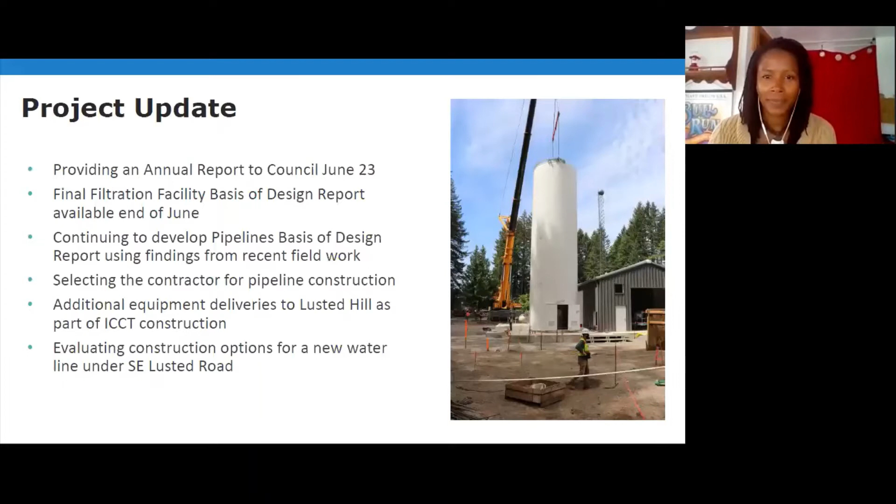Hello everyone, I'm David Peters, the Program Director for the Bull Run Treatment Program. I appreciate you coming out on this beautiful evening. Can't believe it's June already, but the year's moving along, and we appreciate the time you're sharing with us this evening. Just wanted to give an update on various activities we've had going on over the last few months, and some things that are coming up.

So we will be doing our annual report to the Portland City Council on June 23rd. Our agreement with City Council is that we will come to them and provide an update on the progress of our efforts, and this year that's happening on June 23rd. I know that information and the date and time will be posted on our website. Those City Council meetings are public meetings, so if you'd like to participate, that'll be available to do.

The final filtration facility, what we call our basis of design report, will be available at the end of June. That's a document in final reviews now, and will get posted to our website around the time of the City Council report or the week after. That basis of design report is actually the structure of what we're going to design and construct going forward. It has all the details about the processes and systems we'll be looking to incorporate into our facilities, much of which we've been sharing over the last several months. But that will be a final report form.

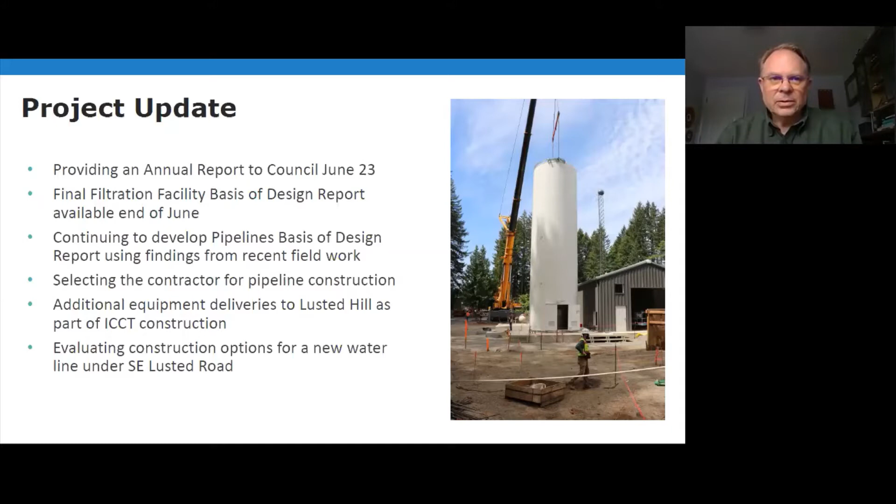Last month, my team was here, and our leadership team for the program in operations, design and construction all came and talked to you about the Good Neighbor Agreement and the details of that document, and provided their commitments to ensuring that we're going to meet what we put together in this Good Neighbor Agreement. I know we've had some questions about how that gets enforced, and that's through our commitments to you going forward. But it's also not just our program leadership team, but we have been sharing this with our leadership team at the Water Bureau, and that's where Gabe Solmer, our Water Bureau director, is joining us this evening to talk a little bit about that and sharing the Water Bureau's commitment to meet the impacts of the Good Neighbor Agreement. So Gabe, maybe if you'd like to jump in and say a few words about that.

Sure, and I know that was a little bit choppy. Can you guys hear me okay? Yes. Excellent. Wonderful. Well, thank you so much for the opportunity to be here.

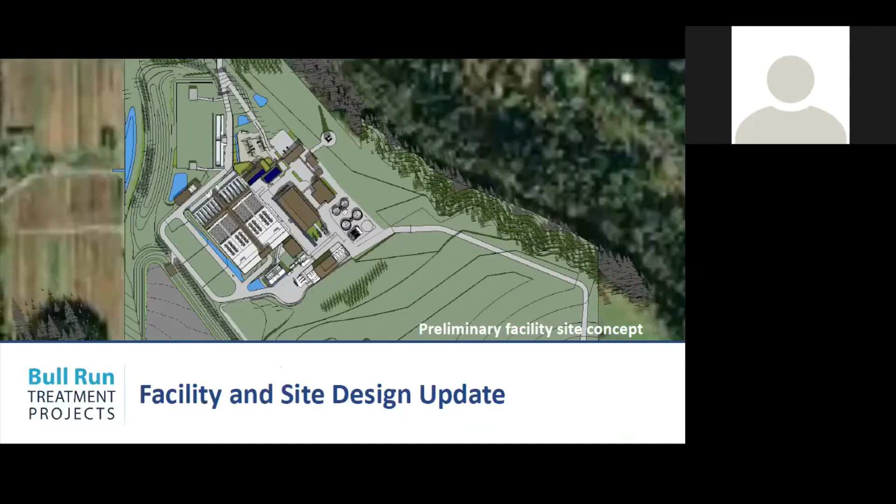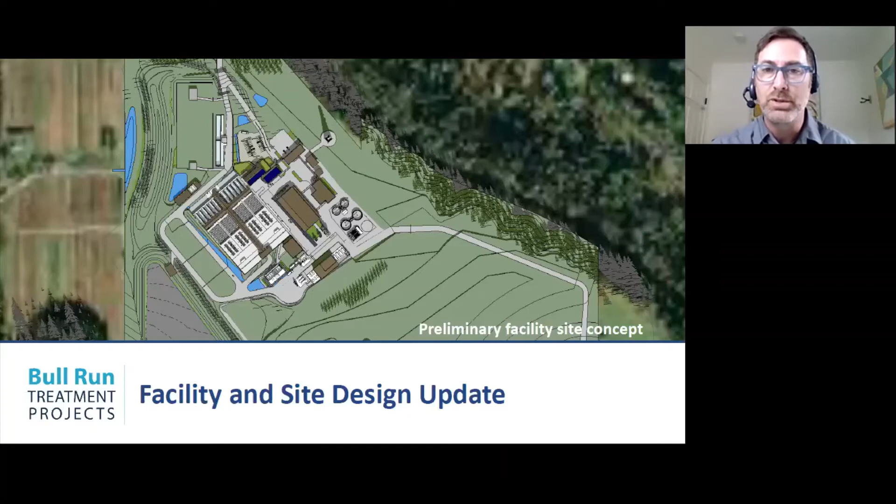Sure, thanks David. Hi everyone, good to be here again with you to talk design. Hopefully you can all hear me and you're all doing well. I am going to present some updates to both the facilities and the site tonight, and get some feedback from you to see if what we've heard from you is showing up in the design and if we're moving in the right direction based on feedback we've gotten from you in earlier meetings.

As a quick reminder, in the Good Neighbor Agreement we have some strategies guiding us toward a design that hopefully fits into the local surroundings and is as unobtrusive as possible—things like low profile buildings and natural looking materials, and maybe most importantly, trying to have an agrarian Pacific Northwest style and screen the site so there's as little visible as possible, really reducing impacts to the neighborhood.

So next slide—what have we been up to since we last discussed design? Well, we are in the 30% design phase, the first of four design phases for this project, and it's moving really fast. We are refining the design based on a lot of value engineering, which helps us look at cost savings, and we are really working on the building spaces themselves, making sure we have the essential spaces accounted for and trying to locate everything on the site the best way we can.

The site layout itself has remained basically the same as the previous time we've presented, with some small tweaks being made now to make sure everything fits in and we don't expand it any further. And the architectural style is evolving to take your and other comments and critiques into account and try to improve things. I want to talk about those changes tonight.

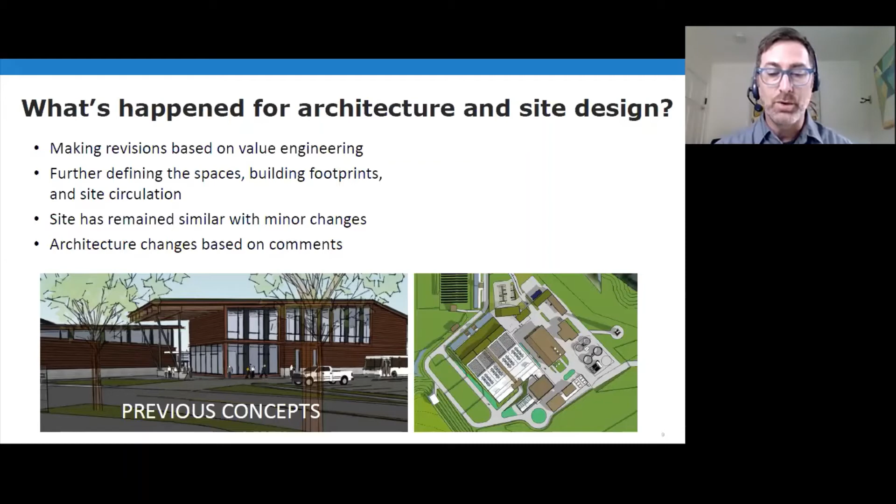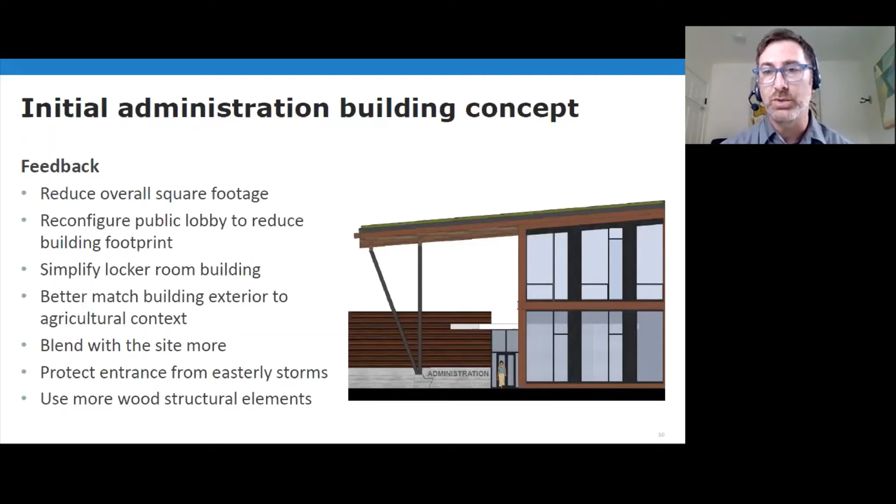So where did we come from? The last time we shared with you, we shared some images, some design guidelines we're working on for the look and feel of the non-process admin building, as well as the process buildings, and some feedback we heard from you and the Bureau. We heard a lot of overlapping feedback. Some of the same things came up, really rethinking the look and feel of this building, taking it more towards the agrarian rural nature of the site instead of the big glassy boxes that are maybe better in a suburban neighborhood. We're trying to find ways to shrink the building, reduce the overall square footage, save money there, and really thinking more about the weather of the site and protecting the entry in the building in that way. We're also looking for ways to integrate warm materials like wood into the buildings where appropriate, so we can really leverage our local resources.

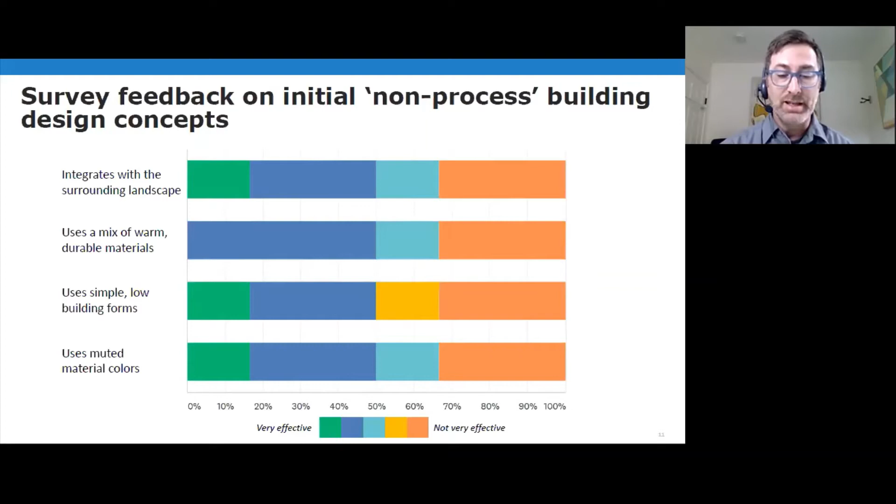Based on some of the public survey responses we got, we weren't quite hitting the mark for most of our goals listed on the left here. Most people thought we were halfway there. So we thought about this critically, and we literally went back to the drawing board for some of these buildings. The revisions we really looked at were based on these critiques, trying to make the buildings only the essential spaces we need, really looking critically at any kind of public function and things like public lobbies, and what's the best way we can serve that need without devoting a lot of expensive space to that. We did reduce the overall square footage.

I want to show you how we did things like move the lobby to basically a covered outdoor space that the operators and staff would use most of the time. We've introduced a more agrarian style gable roof form that, at a distance, would really make this facility fit in better with most of the other types of buildings you see around the area. We're trying to reduce the areas of large glass and look more at smaller windows and openings in these buildings to bring down that scale. We're also integrating more landscape around the buildings, not just around the edges of the site, to help bring down the overall mass of the building and to really try to capture and manage the stormwater as close to the sources of things like roofs as possible.

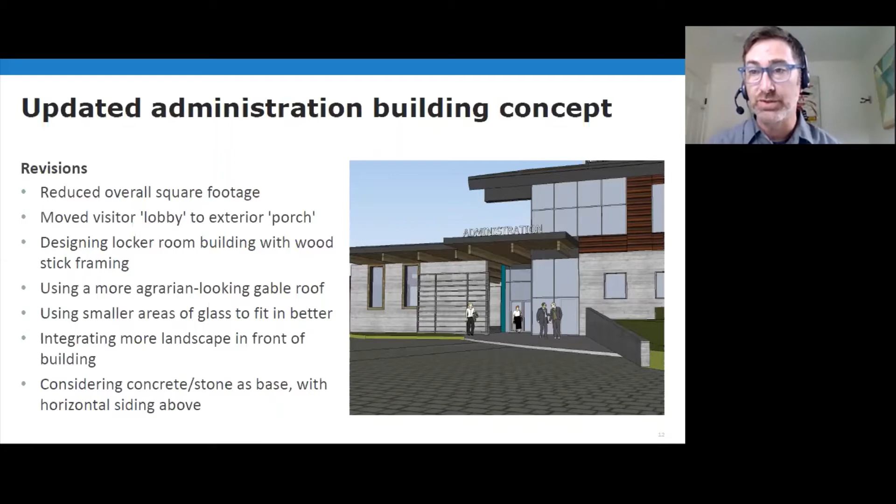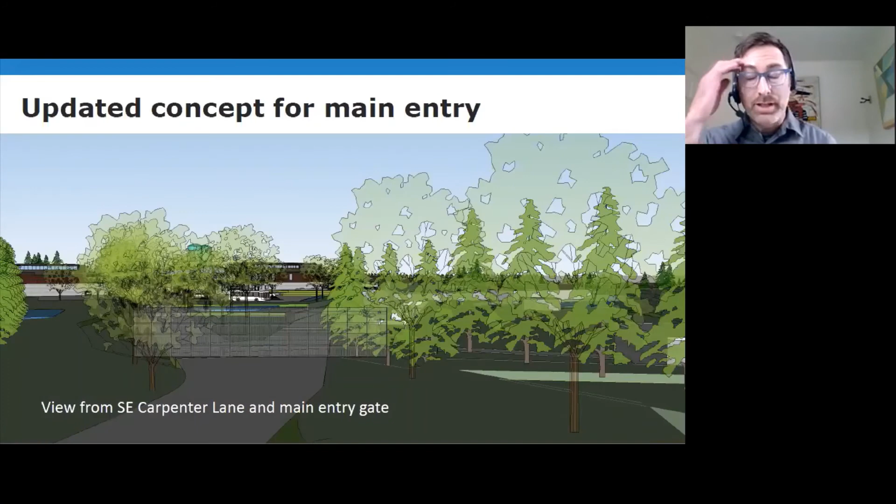Next. We'll discuss the site perimeter in more detail in a few minutes, but this view from the ground level at Carpenter Lane shows the main perimeter gate that is just off the road. This is the first level of the security fencing and the gates for the facility. This shows how the landscaping is really helping screen the views as much as possible as you get up to the main gate. So this is, yeah, you can go ahead and move to the next one. That's okay.

If you were to come to this facility, you would have to first pass through that main gate. As you get closer to the admin building, you can see on the left of this image another gate, and that's the real facility security gate for anybody who's coming to make deliveries would have to pass through that gate as well. For this admin facility, we've tried to break the massing up a little bit more. We have a combination of a lower one-story structure that you see kind of in the middle of the screen - that's what we're calling the porch. It's sort of an open air entry area. Instead of a lobby, we've basically moved that function outside. Behind that is the main admin building. It's a two-story structure. We're trying to reduce some of the windows, but also bring in light through a dormer in the roof, and try to find some good ways to utilize the natural light of the site.

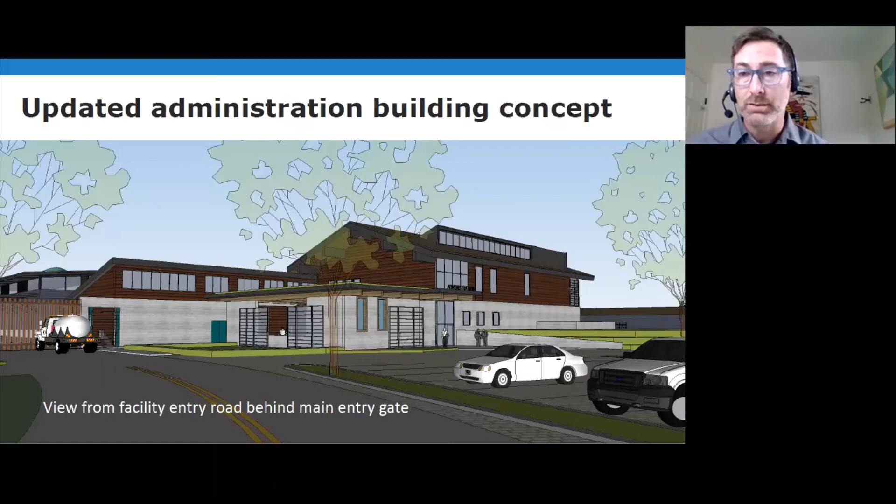Next up, looking at this building from... okay, I'll pause there. Sarah, you have a comment?

The front of the building, as you're showing it to us now, Aubrey, is that facing directly north? That is somewhat off axis, about 30 degrees off of north, I think.

So we wouldn't have that much reflection from winter sun reflecting off of the windows. The building's placement on campus is almost in line with Mount Hood, so the idea would be to make sure a setting sun doesn't make those upper story windows act like a beacon, similar to a lighthouse, or a bad reflection—taking those windows and making sure the finish is not a reflective one.

Does that make sense? Yes, it totally does. And we are thinking about that, and we'll be looking at the right kind of shading devices that help in both directions. We'll do some modeling to make sure we get that tuned up as much as possible. Thank you for that.

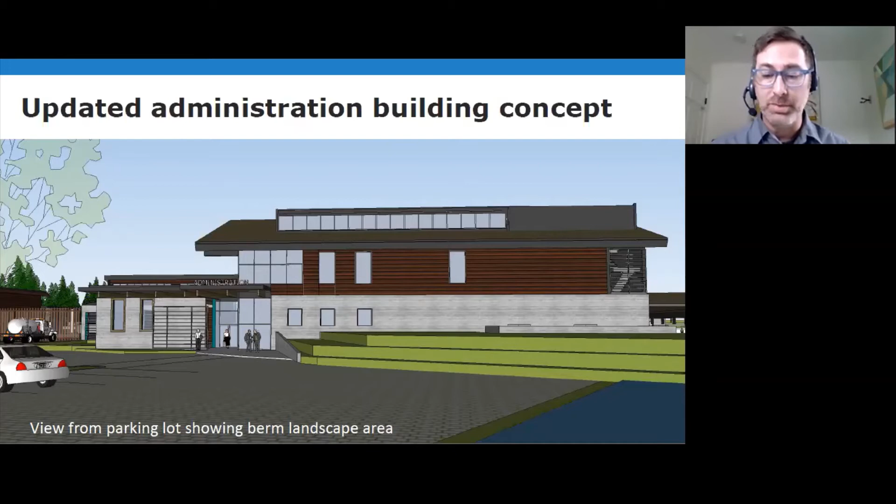The backside of this building—here's a little bit more of a close-up look. As you get closer to the entry, you get funneled into either the porch or you can pass through into the main entry.

Where we have these larger expanses of glass, there is a stairwell and a conference room behind those, and the other rooms are offices. We're still working on the outside of the building design, but this is the direction we're heading for the front entry.

If you were on the secure side of the plant, like on a tour or if you worked here, these are some other areas—the main control room is on the upper story on that corner where you see other large expanses of glass, so operators and controllers can get a good view of the filters and the rest of the process building. We also have our little locker room building on the right-hand side.

You'll notice in the background there, we have a communications tower showing. We'll talk about that later when we discuss the site, but we're trying to find the right spot for it. It keeps creeping a little closer to our buildings, a little further east against the tree line, and we're still working out exactly where it will go and what the design of that tower will be. I'll talk more about that later.

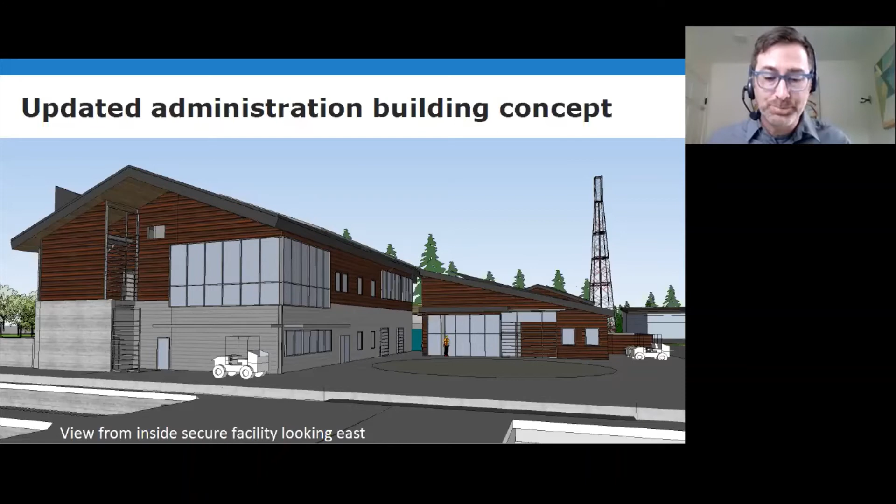For the process buildings, we showed some of these last time, and they are the last thing we're designing right now as we wait for the engineers to finish their work. But we're still looking at integrating a mix of roof types, both gable type and shed type roofs, and we're really trying to react to what is inside these buildings.

Some of these buildings have big tanks in them, some have overhead conveyor belts like the one on the left. So we have to deal with some height limitations and try to make these buildings work for all the machinery inside. But we're also going to integrate some dark materials to help these blend in, and try to put the windows in the right spots so we can get some daylight into these rooms.

I'd like to pause here and get any other general thoughts about the design direction we're going. Do you think we've responded well to the comments we've gotten previously, and are we moving in the right direction? Do you think this is more of the look and feel that will better fit into the local context?

I see Jane has her hand up again. Jane, did you have a comment or question?

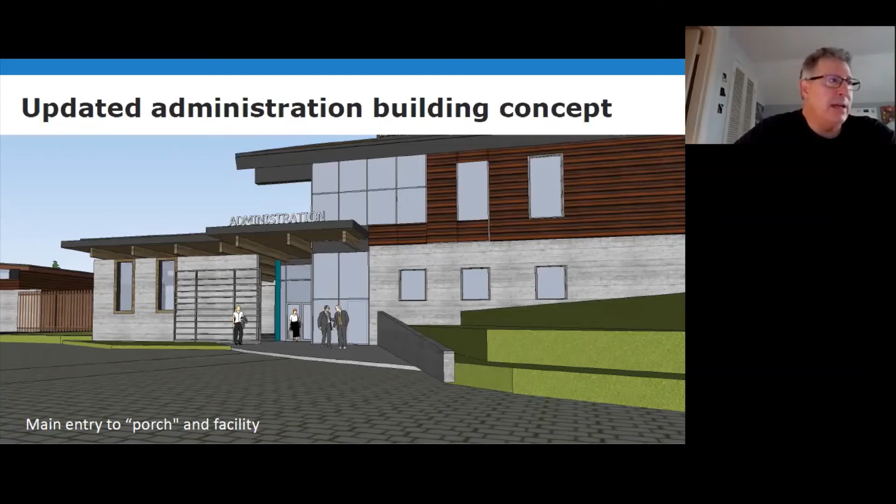Yeah, there are probably at least a dozen different tanks inside, some are rather tall, and operators need access to the top of those tanks. So this building, like the admin building, is likely going to be maxed out in terms of our height limitation, the 35-foot height limitation. This building and some of the exterior tanks, which you see just poking out at the backside there, will honestly be some of the more visible structures from afar, depending on your view angle.

Gotcha. Is the 35 feet the code requirement, or is that a self-imposed limit? That is a code requirement. Okay, so is there no way of putting this stuff underground? I mean, is it physically impossible?

These buildings themselves, not so much. There are some depressions inside where some of the tanks sit, but it's not something we typically go underground with. Well, aside from being typical, I'm asking, is it absolutely impossible to put these things underground? I think it would be impossible based on our cost constraints at this point. In terms of engineering, nothing's impossible ultimately, but I think it's cost prohibitive.

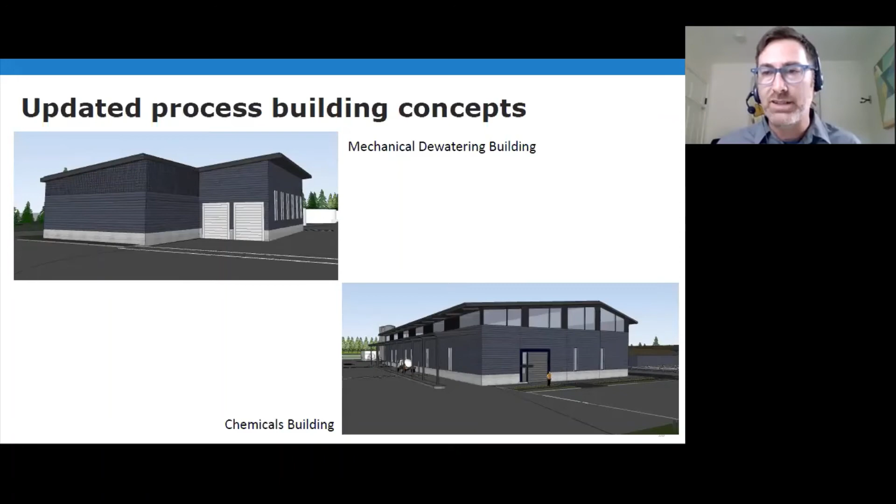And just to piggyback on that observation, there are lifespans to these tanks where the facility will have to replace them and add new ones, and that adds its own logistical challenges if they're buried or deep underground. But we are trying to work with the engineers and architects to bring down this height as much as possible. I've seen some layouts where we can knock 5 feet off the top of this building, and we're going to try to do stuff like that. That's where we represent your views in the design process, bring this back to them, and see what else we can do to push the design. So I appreciate your comments.

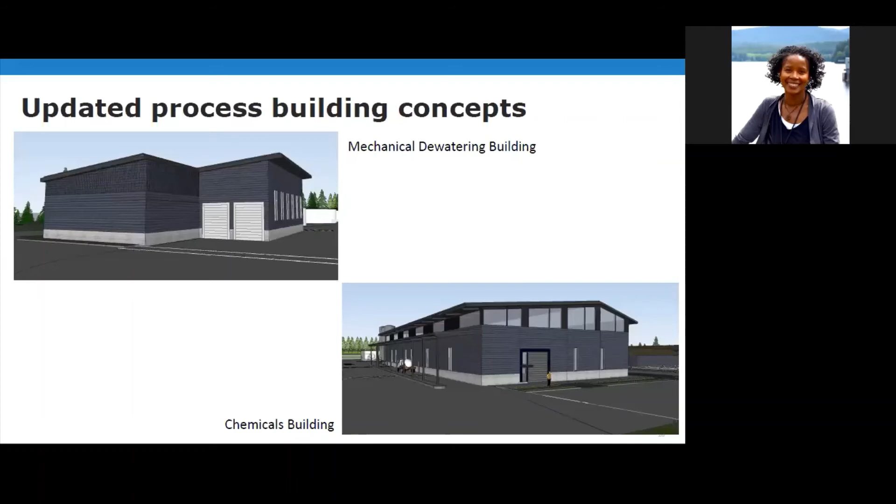So I see you have quite a few more slides left, so let's move along on this one. Okay, sounds good. That's just a little overview slide.

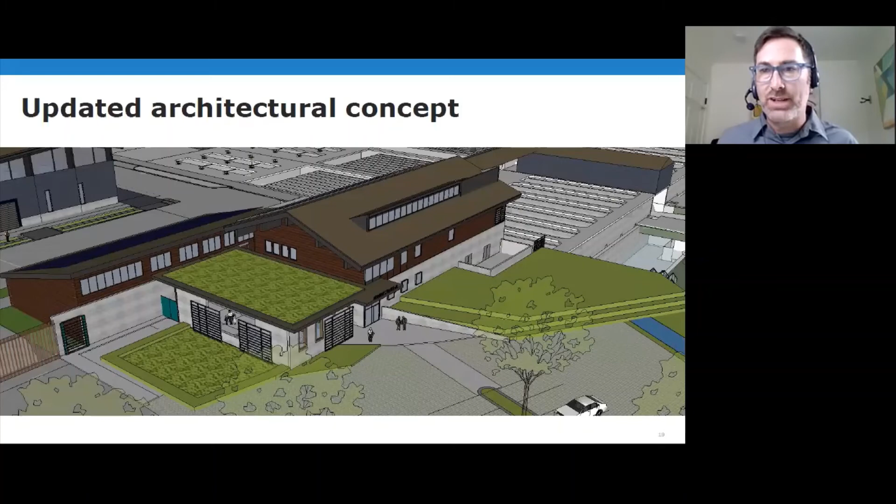Our main access point is still planning on coming from the north across Carpenter Lane. The south access road you see looping down and heading towards Bluff Road is right now planned to be used for construction access and for emergencies, so not the primary access point.

The details I can give you aren't much. It's still under development, and figuring out the access is taking the team longer than we thought. It's turning out to be quite a complex topography, with safety requirements, working with the county, and geotechnical concerns with the site. We've told the design team this is a hot topic and a major concern for the neighbors and the site advisors, and they are on task. There's a small team working with the planners in the county really trying to dig into this, but it's proving challenging and taking us a little longer. So we don't have any major updates to report out this time, but we think that by the September meeting, we should be able to give you more details about how that design is sussing out.

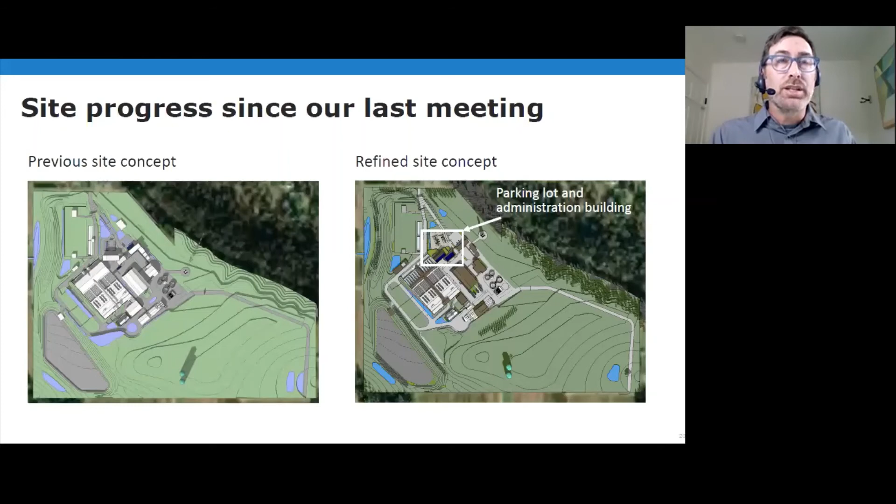I'm looking at the chat right now. The trucking traffic - we've had some stats that we've given about truck traffic. There are some construction truck counts that the contractor is now estimating, for excavation and how many trips will have to be made. Construction is going to see the most traffic. During operations there's going to be scheduled deliveries, scheduled tours, operators coming and going morning and evening, so not that much there. I don't have those numbers in front of me; someone else could probably provide those for you via email. I'm reading from Dean and Pat on the east side.

We are concerned, you know, we know a road may come right by your house, and the team is actively looking at options for that, working with the other neighbors who have the property around you and seeing how we can optimize that for everyone.

Hey Casey, I'm going to read some of these too, because some people watching this video later won't be able to see the chat. Just to recap what Casey was answering, our neighbors to the east are wondering about the access road to the east and on the property side, but they know more information is coming about access roads, and that's true. I'll have more information about that as we move along.

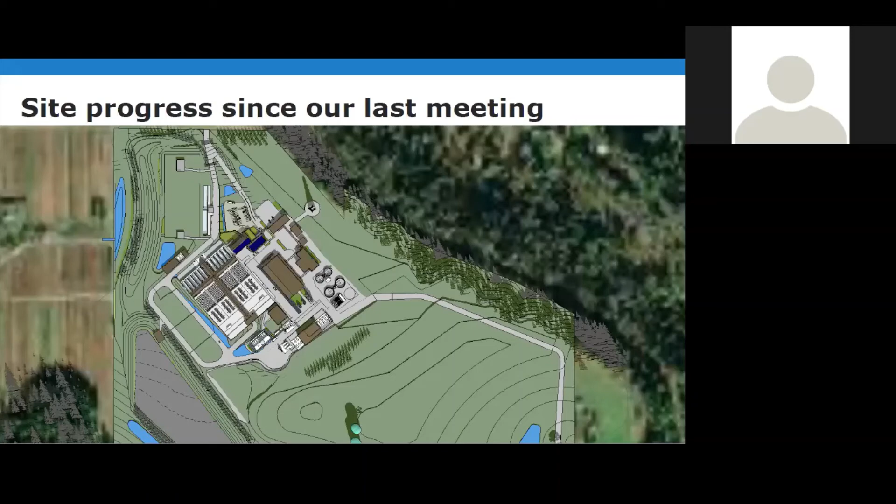But I don't believe it's more than 1 a day. I want to say it's about 3 times a week that they bring school classes up to our facilities and do science projects with them and give them tours of our facilities and things. That's more the frequency we currently do in the watershed, and I'd assume we'd be thinking along the same lines for the future at this facility also. But we'll get more information on what we do today and give you feedback on how that might translate into future trips. Jane has noted on our website, 80 per year between spring and fall, so that's less than 1 per day right now.

Casey, let's keep this rolling.

That is going to be a tall structure, no doubt. We're going to do our best to use the sight lines and the tree line to help make that go away as best we can.

Quickly, I just wanted to recap our strategy for the overall stormwater. That's a big deal for this site. It's a very impervious site as it stands. There's drain tile and lots of runoff, and we hope to actually try to improve that condition through all the vegetation and berming that we are introducing into the site.

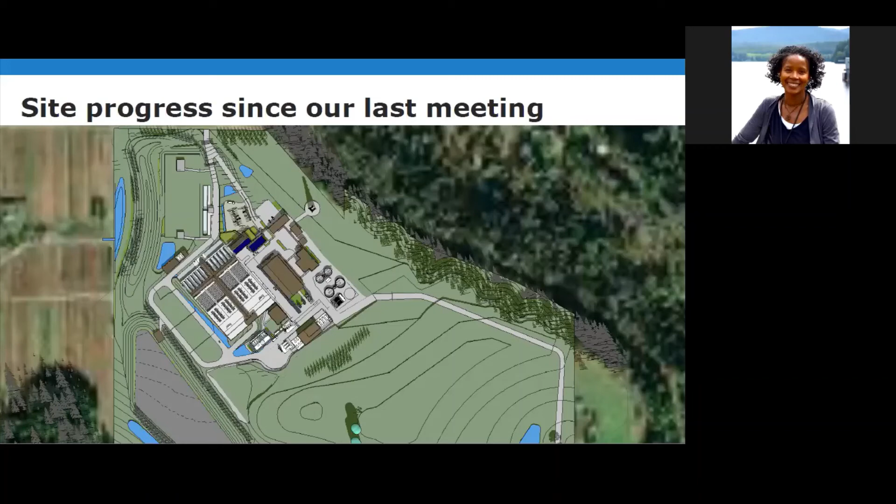So, a question about how tall the communications tower is. I believe it won't be any taller than 200 feet. Is that right? I think that is the max height. It all depends on the angles of where they need to get lines of sight to and the tree line, so we're trying to balance that act right now.

So it will be the tallest thing, maybe taller than the water towers, honestly, but it will be under 200 feet. And the need will be, as Casey pointed out, the sight lines up into our watershed, and it will just need to be a little bit taller than the trees that line the east side of that property. The final height hasn't been determined yet, and there are still some studies planned to get that figured out.

So the last thing I want to show everyone today is some views out of our model that show what it looks like from the perimeter looking into the plant. These views are rather elevated, like you're off the ground 3 or 4 stories, so if you were in a 1 or 2 story building, you're seeing more than you would from your house. We wanted to try to truth out what our vegetation is going to be doing, so we're going to show you some views with about 5 years of vegetation growth versus 15 years of growth, so you can judge how much will be seen early after construction versus later down the line.